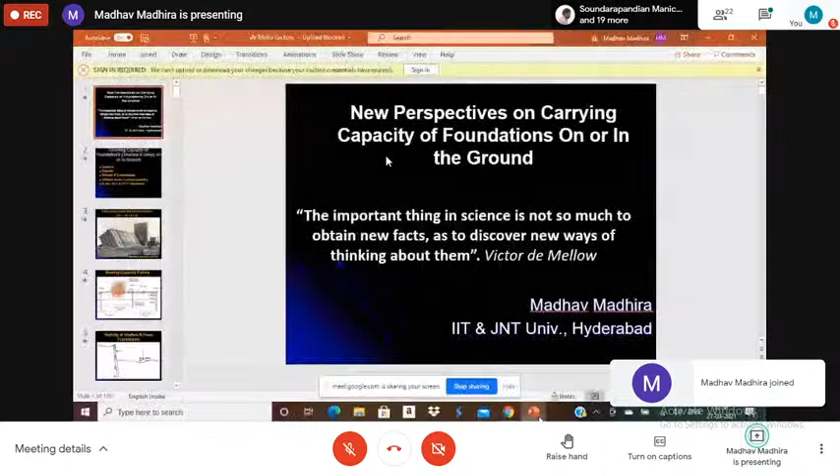Okay. So, let me. Can you see my screen? Visible, sir. Okay. Good. A very nice morning to all the participants, and I would like to compliment you for taking time off on a Sunday and preceding a Holi holiday. Wish you all a happy Holi tomorrow.

Today I'm going to talk about something very different, which will hopefully shake your thinking. I don't know how many of you are aware of the typewriter. My younger lot may not have seen it, but those of us who were born quite some time back lived with a typewriter. The typewriter was developed somewhere in the 1860s, and the keyboard was very different in the beginning. In the English language, the most common letters in any word are predominantly A, E, I. So when the original keyboard was designed, they were in the center where you could have your pointer finger, the second finger, because that is the easiest one to press to get the letter on the paper.

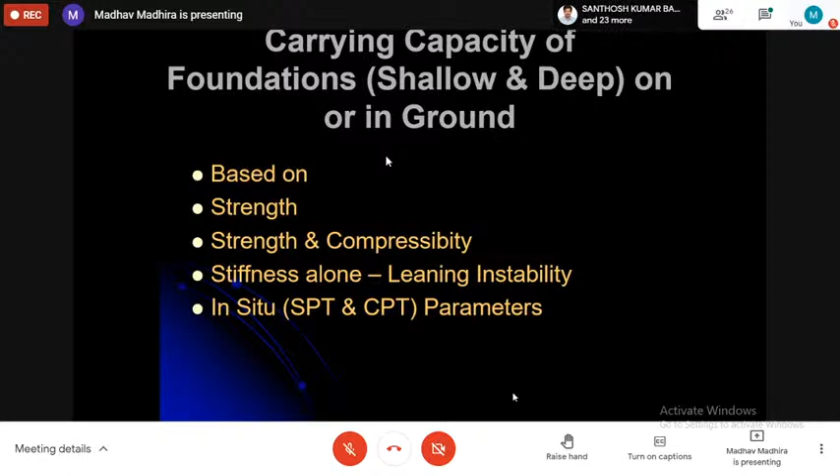But finally, I would like to advise that we reduce emphasis on the strength and depend more on in situ tests like the standard penetration test or cone penetration test, and get the carrying capacity based on serviceability criteria, which means the settlements and deformations with respect to the structure or whatever it is. So this should be the main crux of my presentation, and I would like you to pay attention to why I keep saying that.

Historically, if you look at it, the first grain failure in bearing capacity reported was the Transcona grain elevator in Canada. It's more than about 100 years now. You can see it's a very tall grain silo. Probably the width is about 30, 40 meters, but the height is much more than that. And it was located on soft Canadian clays. When they were filling it up, once the load reached a certain level, it started failing and collapsed.

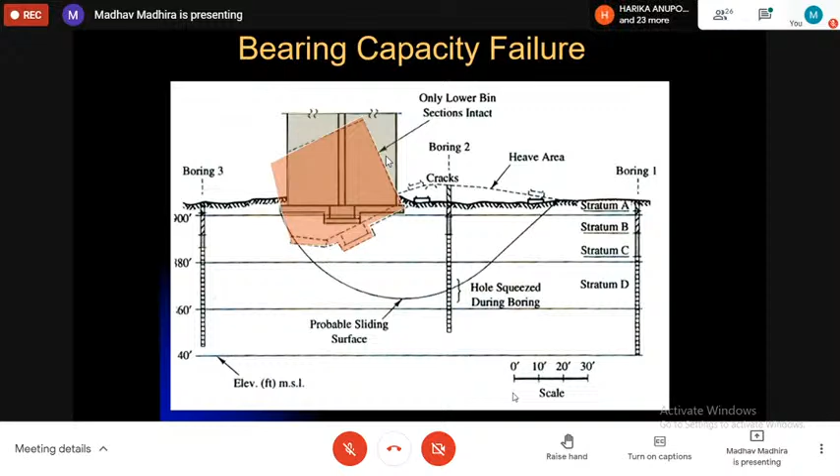Then people postulated the possible sliding surface. As you can see, it starts from one of the ends of the footing, and you can see a kind of circular, semicircular, log spiral kind of failure. And because it has gone so deep into the ground, there's a lot of heave also. The main issue I would like to say is that the soil here is extremely soft and the weight is too high because nobody knew about the bearing capacity theory. They just built it and then loaded it. And that's how the whole thing started. And then they said, okay, we'll try to work out the mechanisms.

So when I look now at the stability of both shallow and deep foundations, as you can see on the right, this is a shallow foundation. We talk of bearing capacity here, whereas in the case of piles, it could be both axial and lateral load. And if it's lateral load, it's a different kind of mechanism, but we are interested in the stability of both shallow and deep foundations.

And our thinking has been frozen from 1943 when Terzaghi came out with his book, Theoretical Soil Mechanics, in which he enunciated that the problems of soil mechanics can be divided into two principal groups. Stability problems, and he called the other elasticity problems, but I call it deformation or serviceability criteria problems. He never realized that these two are related. This is what I want you to start visualizing.

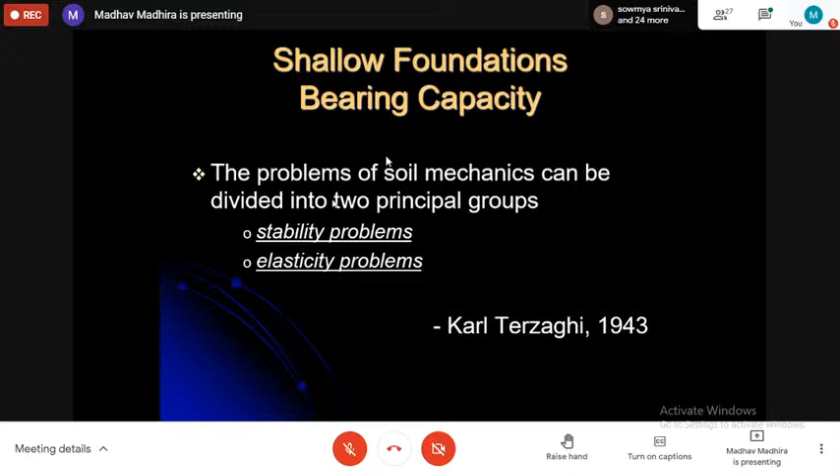He said one set of problems are purely stability problems, where you get bearing capacity. The second set of problems are deformation or elasticity problems, so we calculate settlements, etc. But is that true? I plotted the stress strain curves of all the civil engineering materials.

What are they? We have steel, which is probably the first major manufactured civil engineering material, starting in the late 18th century and 19th century. So we have the standard steel with ultimate strength of 415, so we call it Fe415. Then we have a low yield steel, Fe250. Then we have concrete of various strengths. So if I say M50 or M15, M30, etc., I can plot them.

To make it more visible, I changed it to a log scale for the stress. And you can see the stresses vary from 0.001 megapascal to 0.1, 10, 100, and 1000 megapascals. Because it's log scale, you can see that soft clays have maybe strength of around 10 to 15 kPa. Stiff clays and loose sands probably can have something like 40, 50, 70, etc., whereas dense sands can go up to much more than that. So now you are able to see the strength. But I want you to still realize where is 415 megapascal and where is 10 kilopascal.

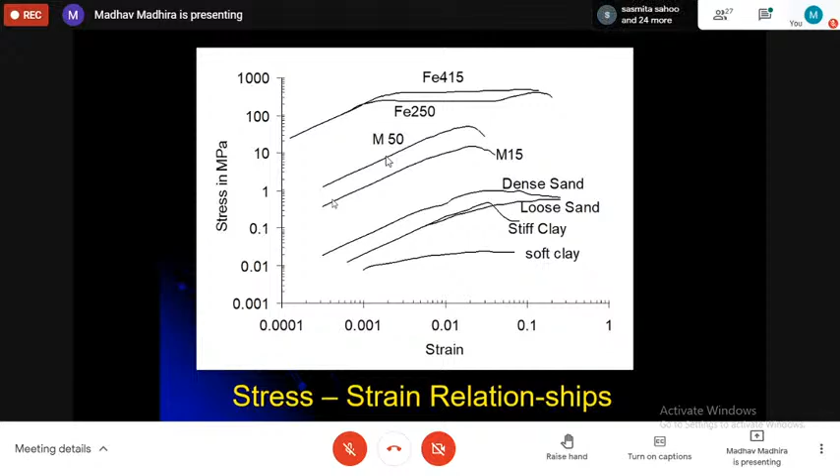So with any stretch of imagination, can I say that the behavior of the soil can be represented by the behavior of steel? Have you ever thought of this? This is the new perspective I want to give you. We have been teaching it and we probably will continue to teach, but I want you to at some stage realize what we are doing is not correct. We need to change. I believe there is a similar exercise in medicine.

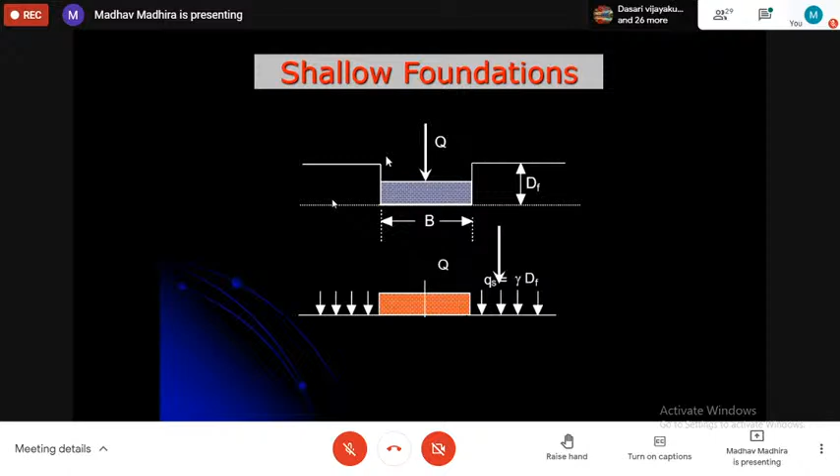And then we follow Prandtl. Here I want to go back to history. Terzaghi was not a civil engineer, he was a mechanical engineer. And mechanical engineers study Prandtl mechanism because Prandtl worked on steel. He was working on how, if I have a steel ingot, do I make it into a steel plate or a channel or a girder? So they heat it, put a high pressure, and it starts yielding and flowing.

So in order to find out what stress he has to put on it to get flow, Prandtl came up with this mechanism. He said, if I put the load or the stress on the steel, please remember, this was for steel. Prandtl never knew anything about soil. Neither did Terzaghi know anything about soil till after he got into geotechnical engineering in the 1920s, 1925, etc. And look at this. This mechanism was given by Prandtl for steel. You recognize the central triangular core, the rigid one, then the radial shear zone, and the passive zones on either side. These angles, alpha, psi, etc., are what we can meddle around with depending on the angle of shearing resistance.

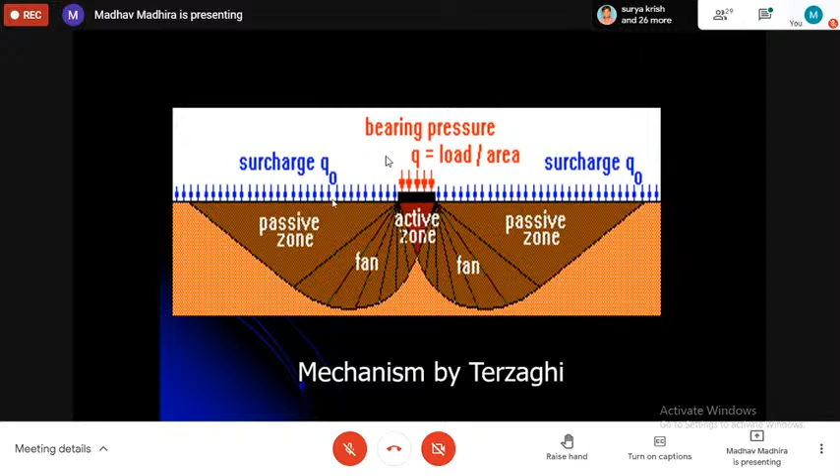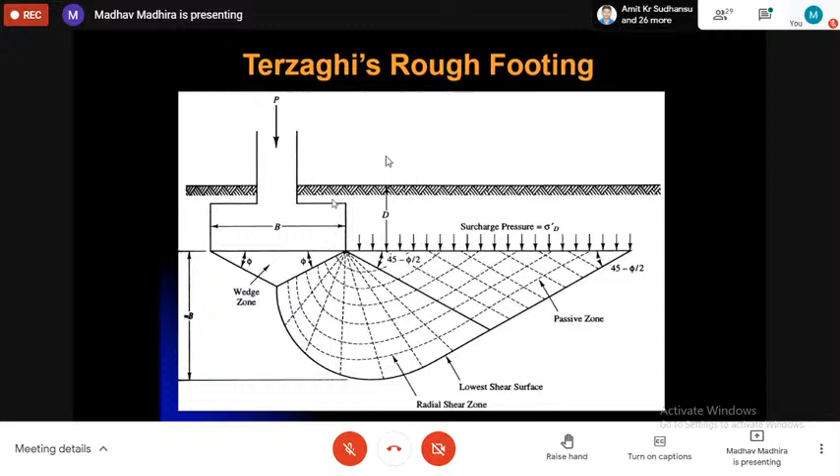So this is how we now convert that into our bearing capacity problem, which is what Terzaghi has done. He said that below the footing we have an active zone defined by 45 plus phi by 2. Then we have a radial shear zone, and then the passive zone on either side of it. Because Terzaghi was aware of the Prandtl mechanism, he said, let me apply it to soil. And of course, then we keep changing. We gave another one for rough footing. He said the active wedge is now defined by the angle phi and not 45 plus phi by 2. We don't use it any further, but we go back to our standard one.

Meyerhof said, no, why are we neglecting the shear strength of the soil above the footing level? He combined it. And I can show at least 100 different papers which extend the same Terzaghi concept, which is borrowed from steel and being applied to soil.

And at this stage, I want you to realize how accurate, how relevant, how rational is it to use a theory developed for steel on a material whose strength and stiffness are 10,000 times less, whereas strain at failure is 10,000 times more. Are we justified in doing this? That is where I would like you to think.

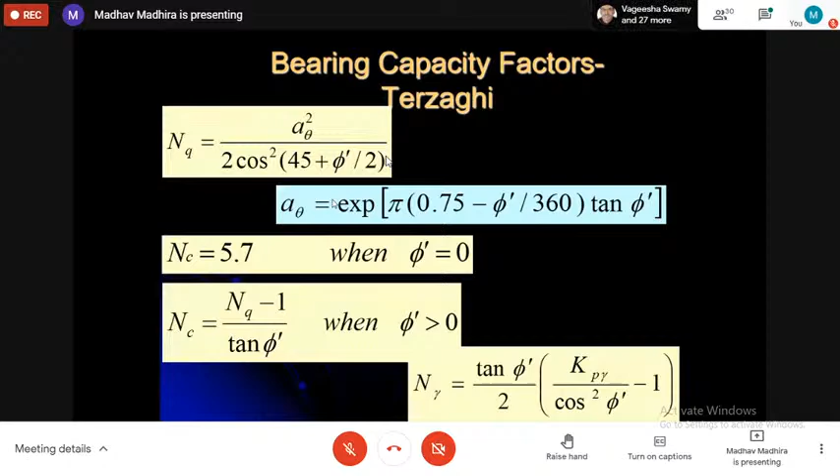And of course, these are all details of how to calculate the bearing capacity factors. And if you look at any of these bearing capacity factors, they depend only on the angle of shear resistance phi, and c and q and gamma. And then in the expression anyway, you have the coefficients too. So nowhere do we have the deformation coming into the picture. That is my point. All our bearing capacity theories seem to depend only on the strength parameters and they don't look at the deformation.

Then Vesic did some very interesting work. He started testing soils at various relative densities and he found a very interesting phenomenon. You have first general shear failure, then what you call local shear failure, where the failure surfaces are not developed fully, only the wedge and the radial shear zones are formed. Then he also tested under very loose condition, in which case there's no radial shear zone, only an active wedge, and as you keep increasing the load, the footing keeps going down and down. So what he said was, there are three possible modes of failure.

General shear failure, as we all know, is where the failure mechanism is clearly developed and there is heaving, as you saw earlier in the Transcona grain elevator. Then we have what's called local shear failure, where the radial zone is not mobilized, so we show it as a dotted one. And then, of course, the punching shear failure, where there is no radial shear zone either.

If I look at the load displacement relations, you can see that the maximum, or peak stress or bearing capacity, is clearly shown, and a sort of collapse is indicated, because if you try to load further, the structure will fail. In case of local shear failure, the failure starts and then you end up getting a kind of asymptotic value. Whereas in the case of punching shear failure, there is no clear ultimate load. As you keep on adding load, there will be more settlement and more deformation.

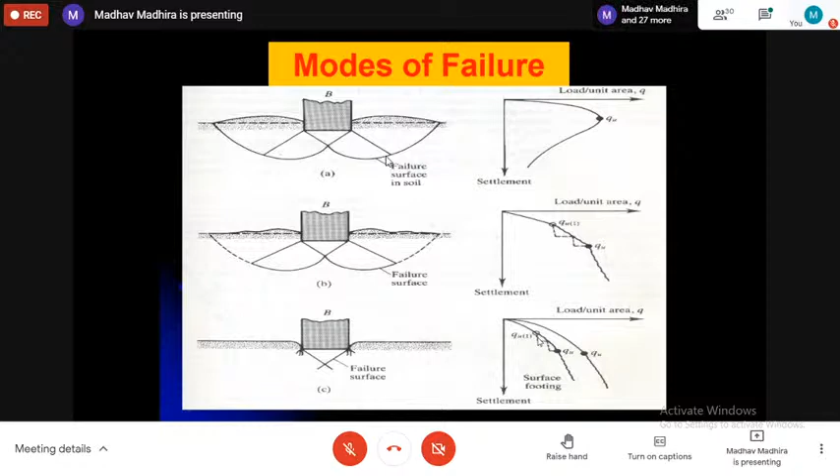So based on this, the following design chart is given, which is not exactly a very analytical one, but a general guideline. If you have very dense soils or very stiff soils and very shallow foundations, where D by B is less than 2 or 2.5, you expect general shear failure. You need to have very strong, stiff material to get general shear failure. For medium dense sand and medium depth foundation, you can expect local shear failure. For loose sands and deep foundations, it is punching. This is a general guideline. Nobody knows how to get them exactly, but these seem to be working fairly well. But at least we recognize three different varieties.

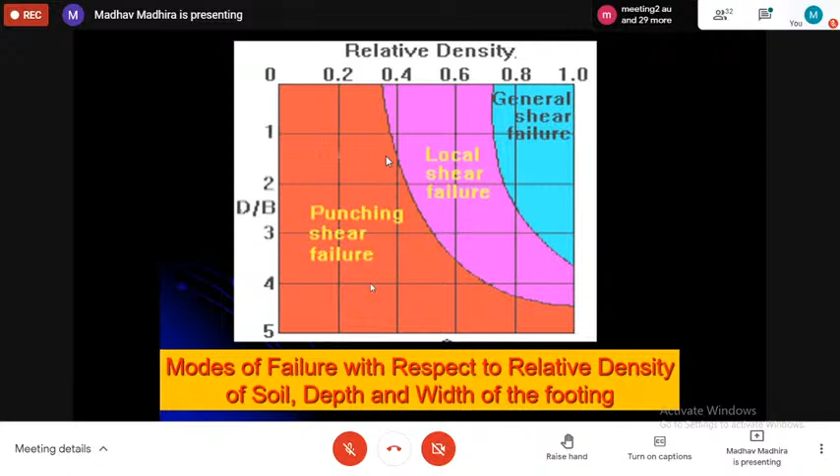So for general shear failure, even less than 10% is very large, 5 to 10% of deformation. I mean, if I have a footing of, let's say, 2 meters, 10% of that is 20 centimeters, whereas we don't allow even 20 centimeter settlement. So we never get that. Whereas if I have local shear failure, the strains can be anywhere from 12 to 15. And in case of punching, it could be 15 to 22, 25%. This kind of thing doesn't hold good. Now think how relevant the general bearing capacity formula is.

It depends on several factors. If I'm plotting normalized settlement, settlement divided by width of the footing, against the mobilized bearing capacity factor, you can see it depends on smooth and rough footing. It also depends on the dilation. Most granular materials dilate, and it depends on the surcharge too. If I have q equal to 10, I get this value. This is all through the finite element method used by Professor Potts at Imperial College. You can see both load displacement curves are very different, and they are functions of the dilation angle, how much volume change you expect. If nu is equal to 0, then there is no dilation. But if nu is equal to 25, there is a large dilation. And you get this factor as a function of even surcharge stress. Have you ever realized that Nq depends on surcharge?

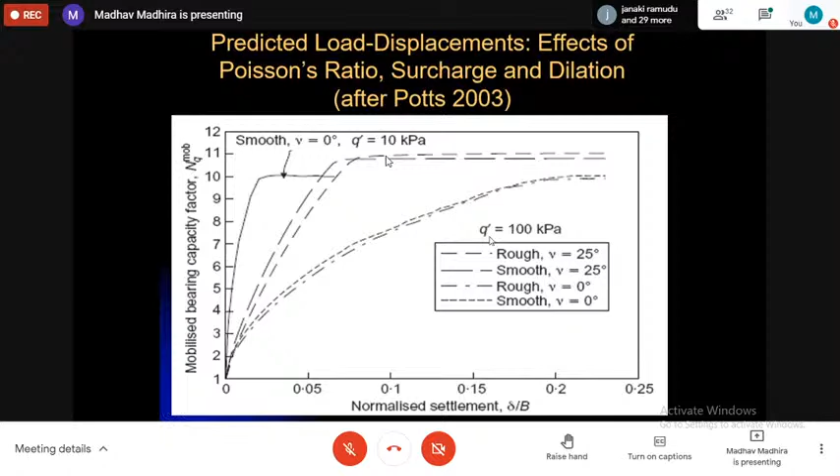This is another set of data you can see for smooth and rough footing, again from Potts. So apart from all those c and phi, you have dilation coming into the picture and the surcharge effect, and the smoothness of the footing also.

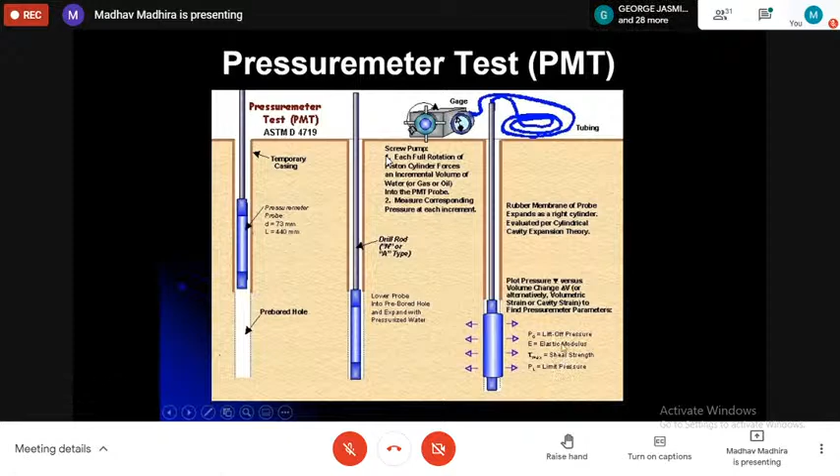Now I want you to switch your thinking from simple bearing capacity to a new kind of test which was developed way back in 1960 by Menard. What he did was make a hole, put a cylindrical probe inside, and start inflating the cylindrical probe, which pushes the soil radially outward. This is called the pressure meter test. As you can see here, in the pre-bored hole, I installed the pressure meter. I increase the pressure, and from there I can measure the amount of liquid you are pumping inside, and you will get what is called the limit pressure, PL, from the liftoff, just when it is touching. You can get both the ultimate shear strength of the soil as well as the deformation modulus from this test. If I put the schematic, this is how it is.

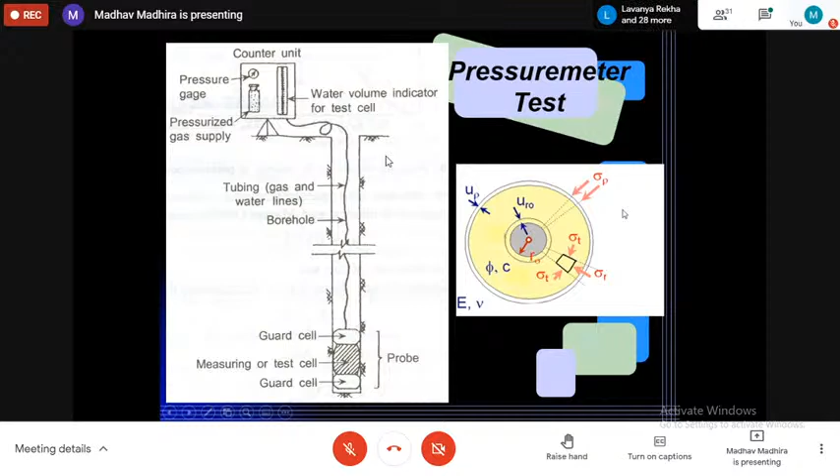We normally provide a guard cell on the top and bottom because the central portion is going to be one that will expand radially. And how does it do? You can see here, this is the probe. Initially, you will have a plastic zone, then you will have the deformation elastic zone. You can develop enough theory, which is what was done by Gibson and Anderson way back in 1961.

The limit pressure PL is equal to Cu into Nc star plus sigma h. Can you identify that this is nothing but, in case of clays, Q is equal to Cu Nc plus Q naught. That's how we calculate ultimate bearing capacity of foundations on soft clays. This is very similar to the ultimate bearing capacity of soils, except in the limit pressure, we have Nc star, which is equal to 1 plus natural log of G by Cu.

Do you realize one of the most significant improvements? Now the bearing capacity factor Nc is a function of the ratio of shear stiffness to undrained strength. Would you now say the bearing capacity factors are not functions of phi alone, but they should be functions of stiffness and strength parameters? Why do I say that? Steel is a rigid plastic material. There is very little strain before the material reaches failure. Soils are deformable materials, which means in order to reach failure, they have to undergo large deformations. And how do you define large deformations?

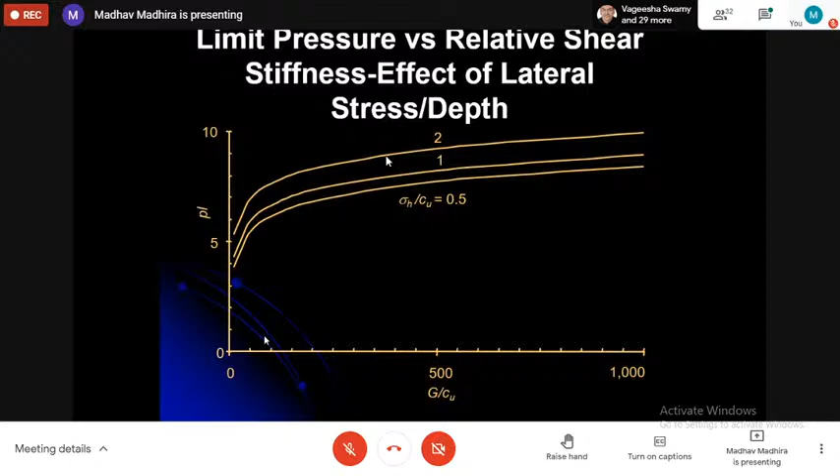So one of our colleagues here, Professor Padmavati, has done a very simple analysis. Look at the G by Cu, that is shear stiffness divided by undrained strength. As you increase it, the limit pressure increases for different values of confining stress or depth of the footing. So sigma h by Cu, if it is very close to the ground level, is 0.5. If I go deeper, I get 1 or 2. Can you see basically the limit pressure is a function of relative stiffness G by Cu, and it's not constant. So can I say that for the first time we have a new way of looking at and estimating limit pressure, which you can convert into bearing capacity.

Anyway, what we tried to do was normalize it, and we also did this for granular materials. So here we looked at G normalized with gamma into D, and fortunately the variation does not depend on the friction angle that much. We have tested for angle of shear resistance 20 to 45. All the curves seem to be very close to each other. But the fact I want you to look at is, if G by gamma D is very small, say 1 or 2, the limit pressure reduces to something like 55% of the rigid plastic one. So when I have very stiff material, I get 100%. Very loose material, it can be half of it.

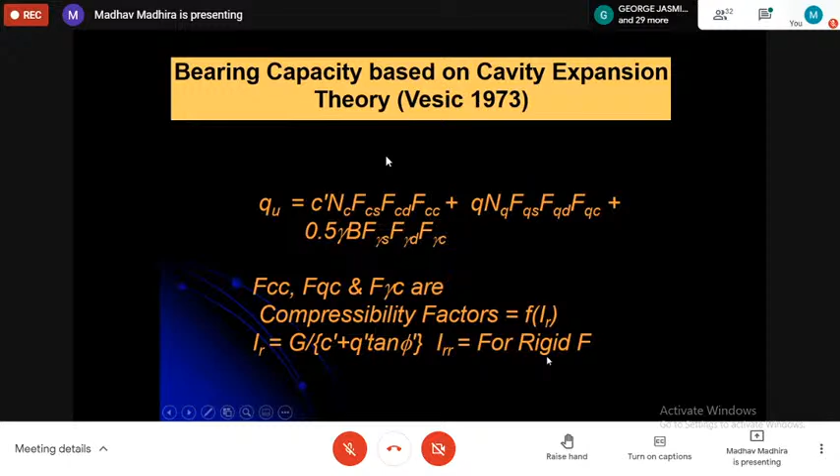So basing on that, we again try to calculate the latest bearing capacity expression. You can see Cu and C, shape factor, depth factor, and we have FCC, which is your compressibility factor, FCC, FQC, F gamma C. And all of them depend on this rigidity factor, which is given by G by C plus Q tan phi. And of course, for very rigid, no dilation, we have rigid foundation too. And we try to calculate all of them, and you can see these factors are given by basic FC, FQ, and from there you can get F gamma anyway.

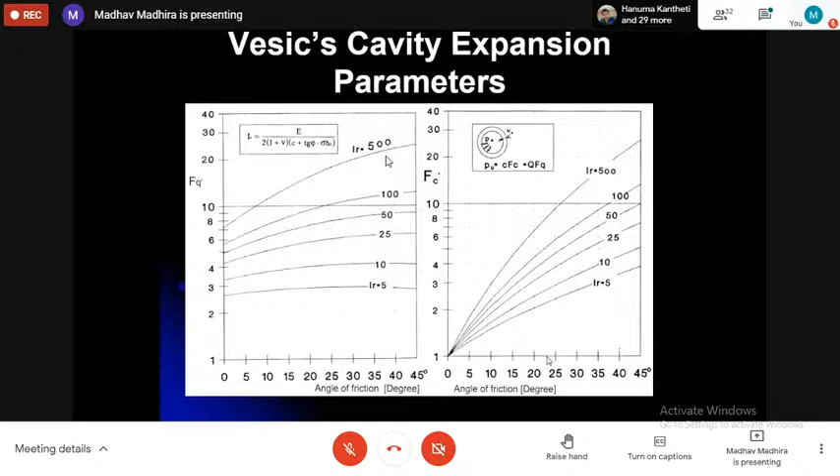Using that, we try to calculate how much the bearing capacity is affected. You can see that if I have a rigid material like what Terzaghi has given, I get 100% of what he predicted. But in reality, when G by gamma D is less than, say, 1, 2, 5, or 10, the bearing capacity reduces to less than 50%, maybe 20 to 30%.

I want to look at this range, depending on the C by gamma D. So what is the value? And this, of course, is the volume change that you expect due to dilation. Now, I want you to realize that bearing capacity is a function of the strength and stiffness, because everything depends on this parameter, G by gamma D, and of course, the relative rigidity factor, which is nothing but volume change.

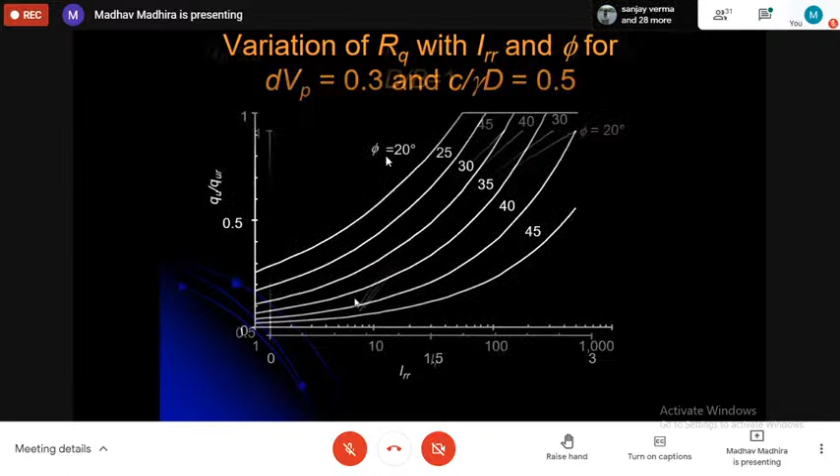And here are the different values for the friction angle, 20, 30, 40, 45. So the strength can reduce depending on the relative rigidity, even without all those gamma values, from 1 to as low as 55%, as I mentioned earlier. So when I'm looking at the ultimate strength, Qu, for a deformable solid with respect to what Terzaghi has given, that is 1. I normalize with Qur, which is the rigid plastic material. And look at phi equal to 20, 25, 30, etc.

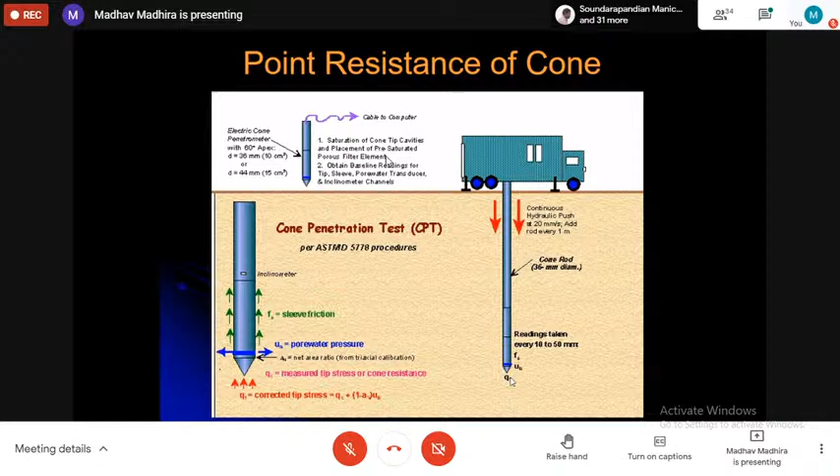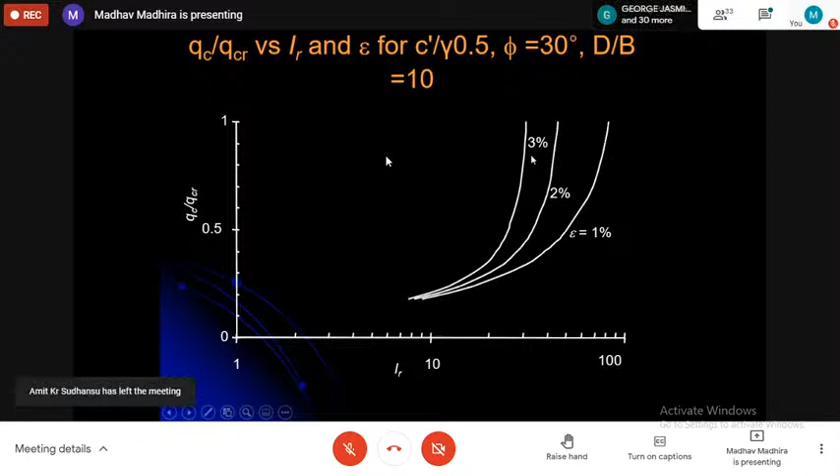So when I'm designing axial loaded piles based on tip resistance, because this is how we do the calculation, please remember the tip resistance is a function of G by Cu, and you have to calculate based on that. This is how we calculate Q, base resistance, and the shaft resistance. Shaft resistance is integrated, and here I would like to say ultimate resistance, if you calculate based on N value, is fine. We take it as 40 times that with the L by D and we put a maximum value. And we are not depending anymore on C and phi. We are only based on either N value or tip resistance.

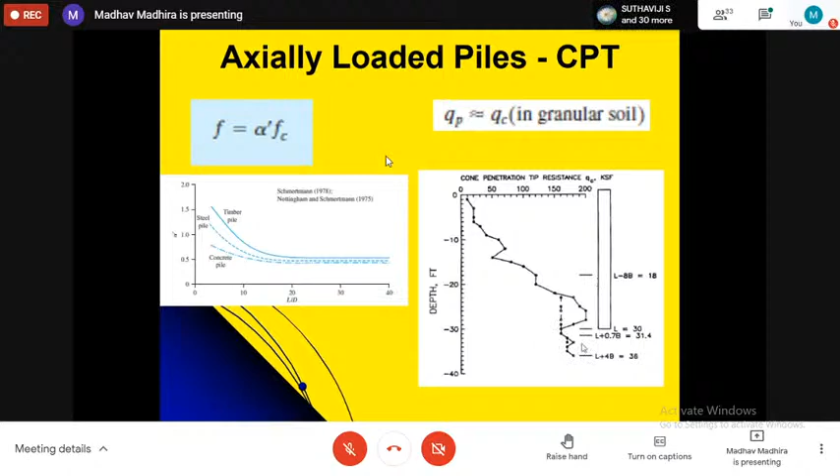Even that, we should not depend on a single value. If this is the depth, we go at least 3 to 4 diameters above and 4 diameters below. We try to average out the N value or the tip resistance and get the value for calculation. No more gamma B, etc.

So here, if you want to do that, you still have to go for the Rigidity Index factor, which is how we calculate it. E by 2 into (1 plus nu) is nothing but the shear stiffness. So please remember, if you want to calculate based on strength parameters, you have to correct for the deformations as well. This is Nq, where N sigma is a function of this expression, and IR has a very significant contribution to this. And IR, as I told you, is a function of shear stiffness by the stress into tan phi. So that again is how I would like to modify the whole bearing capacity for axial and bearing.

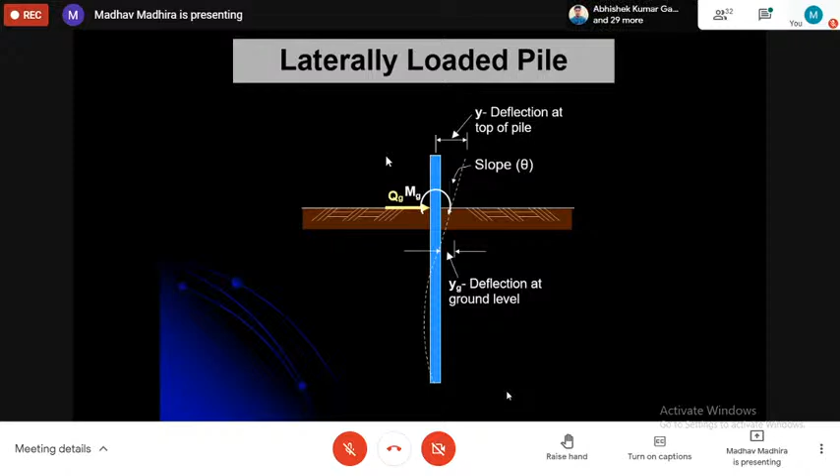Then when you come to the laterally loaded pile, it's a little more complicated, because with laterally loaded piles you end up getting large deflections, and then we may have to have the complete load displacement response. So we did some work on this, and we look at different kinds of pile lengths, fixity, etc. A laterally loaded pile acts as a beam and not as a column. And the beam can be a short one or a long one. The end conditions could be free or fixed.

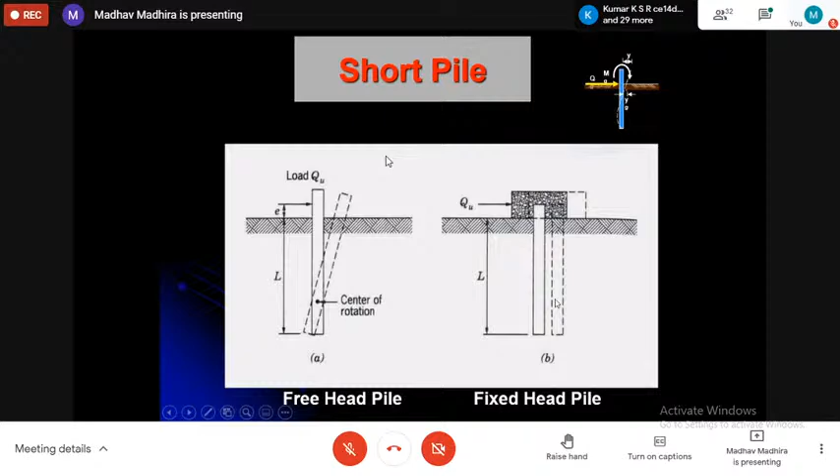So depending on how you look at it, for example, if I have a free head pile and I apply a lateral force at a certain eccentricity E, I assume it rotates about some point. So the pile will rotate to the right above the point of rotation and will move to the left below that. Whereas in the case of a fixed head pile, the whole mechanism is very different. The whole pile will shift because it's a short rigid one. It purely translates. And if I now try to measure these things, we have some standard solutions given by Brinch Hansen from Denmark and Broms from Sweden, which unfortunately are very outdated, in the sense they were given in the 1960s, when our concepts of soil mechanics were very limited. And they say, okay, we'll take the pressure linearly increasing for the soil pressure and calculate.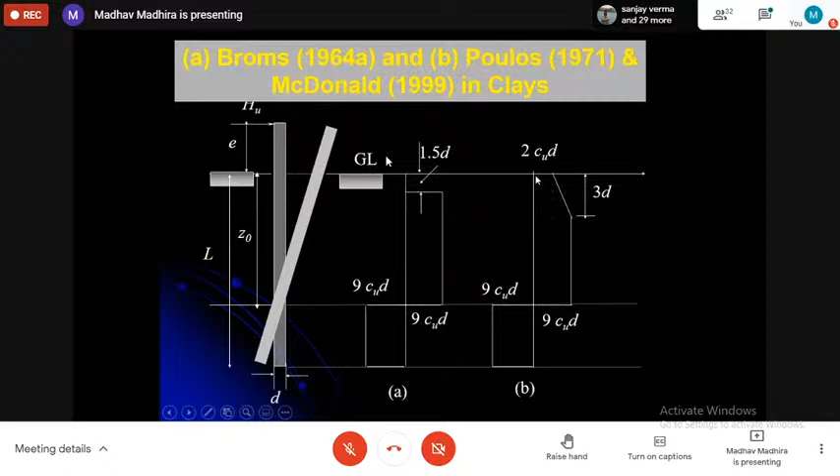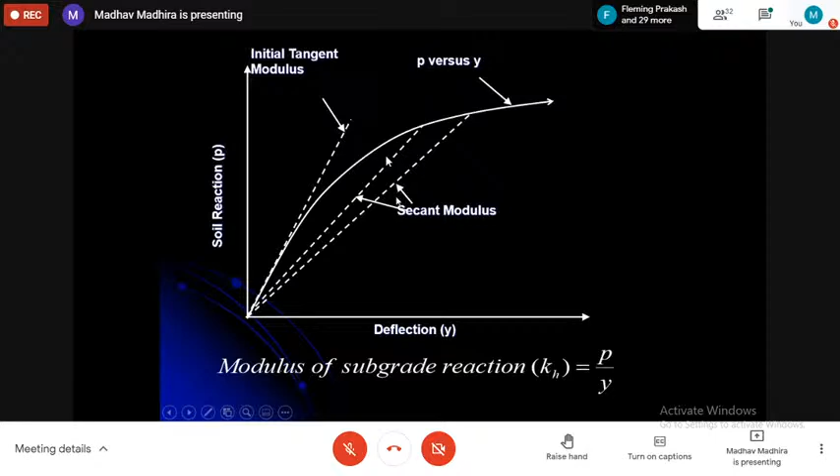We put in now Ks, which is the stiffness of the soil-pile interaction. We are treating the whole thing as a Winkler spring, and we have a load deflection behavior. We have deflection here versus soil resistance, and we know that it's more like what they call a PY curve. If I look at very small displacements or deflection, I get the initial tangent modulus. But as we increase the load or the stress, the curve becomes flatter. Then you have to take a secant modulus. Another form would be to treat it as a hyperbola. This is what we have done.

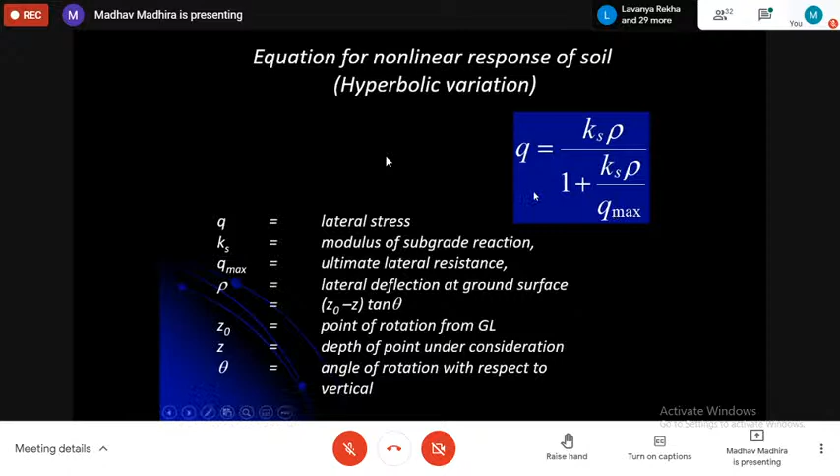We say that Q varies like a hyperbola. The expression is simply Ks into lateral displacement by 1 plus Ks into rho by Q max. This is your ultimate lateral resistance, which is 9 Cu or whatever you have there, whereas it's a function of both stiffness and the ultimate resistance. So once we define the response Q as a function of these, we can calculate.

In case of sand, we found another very interesting thing. The stiffness Ks increases with depth. Actual variation could be anything, but we make it simple in terms of a linear variation, so that I can say Ks increases linearly with depth, and the constant parameter is called NH. So we define two parameters, the stiffness into length by Q max, and then in case of sands, we also have NH, which is the rate of increase of Ks with depth. So in case of clays, we assume Ks is constant. In case of sands, maybe we'll have to consider linear too.

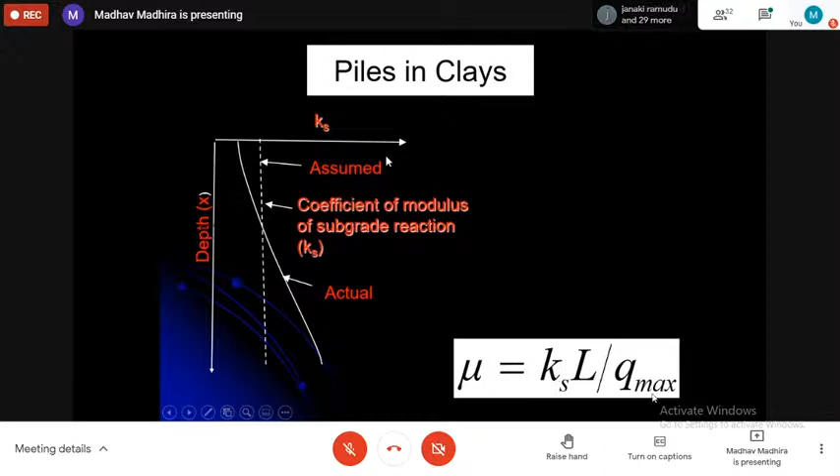But I want you to look at this parameter mu, which is Ks, the coefficient of subgrade reaction, into the length of the pile by maximum Q, which is 9 Cu if you want to consider, or 3 gamma prime. And here we found out how the load varies with respect to displacement as a function of mu. If you remember, mu is Ks into L by Q max. If I have an infinitely strong material, mu is 0, I get a linear variation. Otherwise, I find that the load increases with displacement, and in some cases, it may not even reach the ultimate value, except in case of very weak materials where the ratio mu is maybe 100, 200, etc.

Now, this tells you again that for lateral capacity, there's nothing like an ultimate value. It's a function of your displacement. How much displacement are you going to tolerate? And that depends on the Ks value and, of course, Qu, which is your 9 Cu. So apart from strength, the stiffness matters too. This is for eccentricity e0, that means the load is applied at ground level.

Then we were trying to compare what Broms is doing and what we do. In the sense, Broms has taken, in case of sand, 3 times the passive coefficient Kp. Why? Because the passive coefficient is for a wall, which is a plane strain problem. A pile is a cylinder or a square, so the failure can go around the pile. So he said, let me take 3 Kp as the maximum resistance.

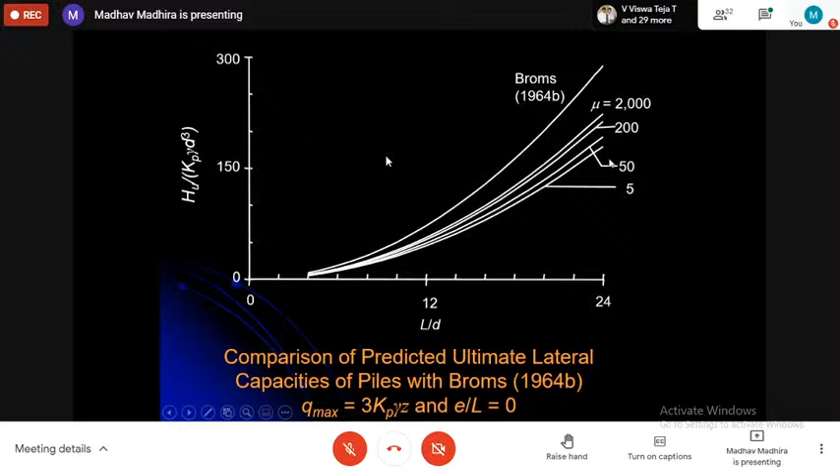So we did similar charts, and we were trying to figure out where Broms comes in. It turns out that if I take 3 times Kp, 4, 5 Kp, etc., roughly Broms matches with somewhere around 3 Kp, while ours looks like 4 Kp, etc., which means Broms' is again a very arbitrary value of 3 Kp.

I don't know how we ended up, but some postulation he made, which we shouldn't actually buy all the time. So we then said, we have predicted the ultimate load. Let us also try to see how the deformations look like. So we were comparing measured data with our theory.

And you can see here the measured points don't fall anywhere near Broms or any of the other ones. What we have found out is very close to that, both 5 and 6, the match here. Whereas if you look at Prasad and Chari, Zhang, etc., they don't fit anywhere. These are all experiments done by Adams and Radhakrishna way back in 73.

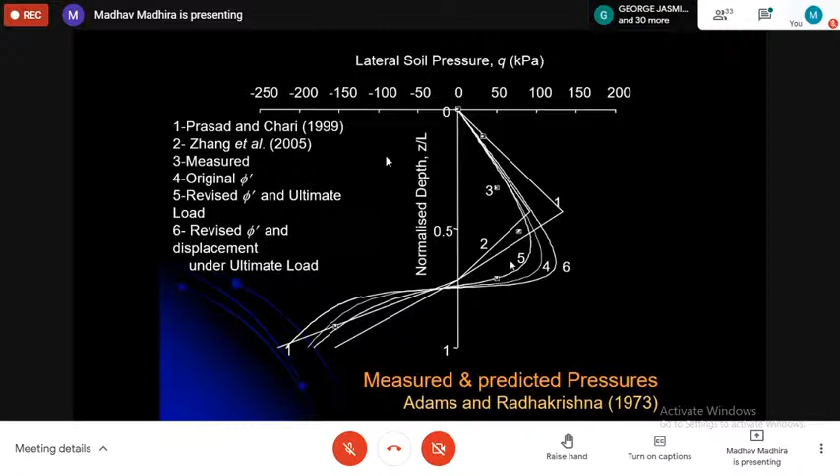And here again, I want you to see the measured is 3, these points, and you can see our 5, which is very close to whatever is measured. So this is what I would like you to look into as a possible result. Then we also had a few other theories like McDonald, and we also find that while they fall in this range, both Broms and McDonald do not look at the deformation characteristics.

So we have a whole range of design charts where H by CuD square, the ultimate lateral capacity, for different lengths I can estimate based on this parameter mu, which is nothing but Ks into L by Cu. And it's a variable. The ultimate capacity is a function of relative stiffness.

I have another set of data which we found out, where at failure, what is the variation? And as I said, Broms neglected the strength here. So his strength varies from 9 Cu here to the right, above the point of rotation, 9 Cu below that. McDonald just modified, instead of neglecting, he took a linear variation from here to here. Rest of it is very similar to Broms.

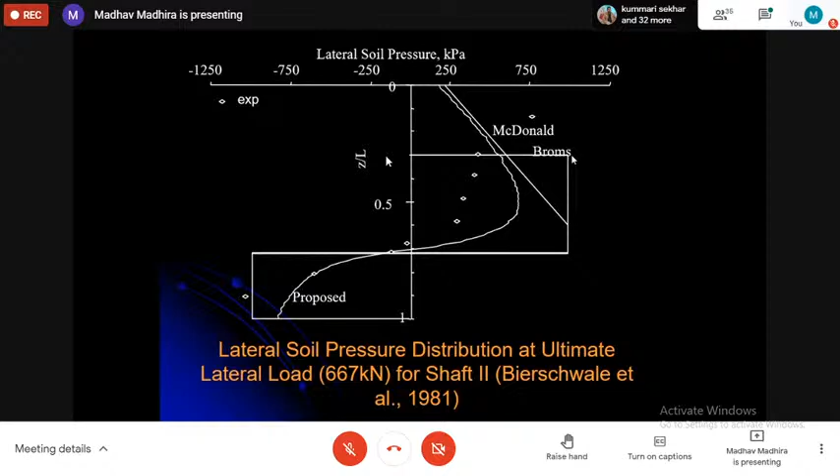Whereas these are the measured values which were measured along the pile at failure, and we found out that our prediction is not too bad, except here there is much less compared to what we did. But you can see our predictions are much closer to both Broms and McDonald. So we can see that deformation is a very important thing.

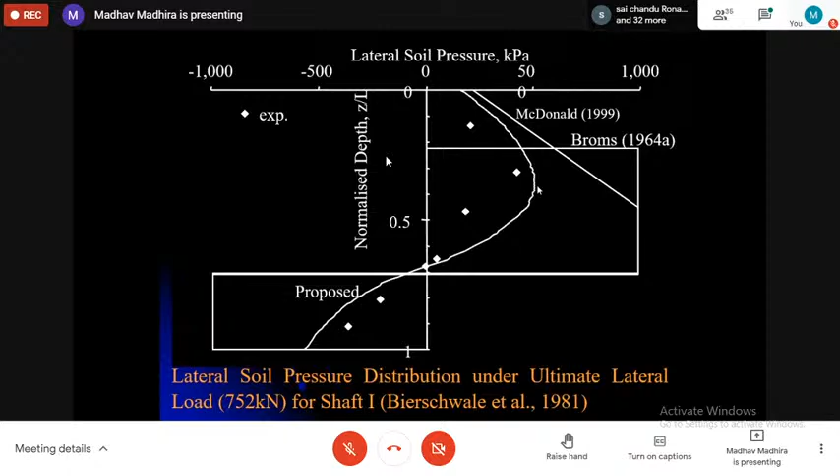Another experiment we have for shaft 1, and you can see the fit is even much better here now. Right? You can say that you cannot neglect the relative stiffness. You have to consider that, and you can predict it.

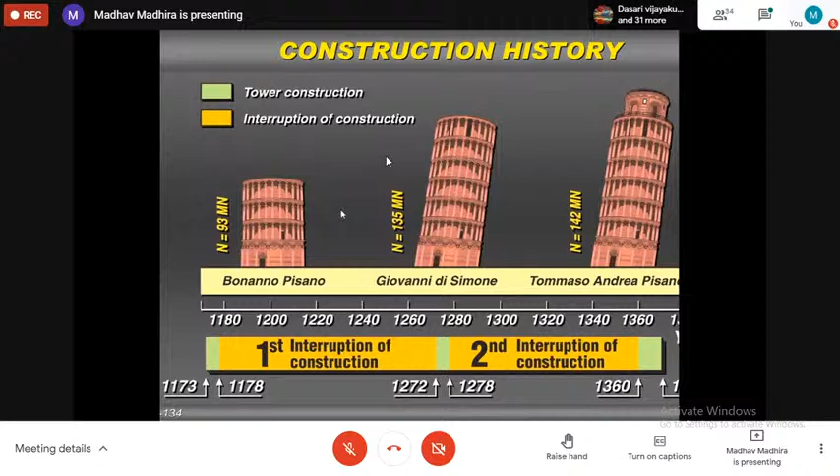I think most of you know the history of it. It was started in probably the late 12th century, went on for construction for about 200 years, and it was tilting right from that time, but they went on constructing in spite of it. And so you end up getting this final position, which was reached somewhere in 1990-91. The maximum tilt was around 5.5 degrees, and out of plumb deflection or movement is around 4.3.

I think you know that at this stage, they froze the tourists reaching that place because they were afraid of the Tower of Pisa falling. They invited 3 famous geotechnical engineers, Carlo Viggiani, Michele Jamiolkowski, and John Burland from England. They said, what can we do about it? They came up with what you call controlled extraction to correct it by something like only half a degree, and then it made it safe for the next 50, 100 years.

This is how it keeps changing. This is where we had the data from the 20th century. They've been able to measure the tilt. And finally, as I said, it's around 5.5 degrees.

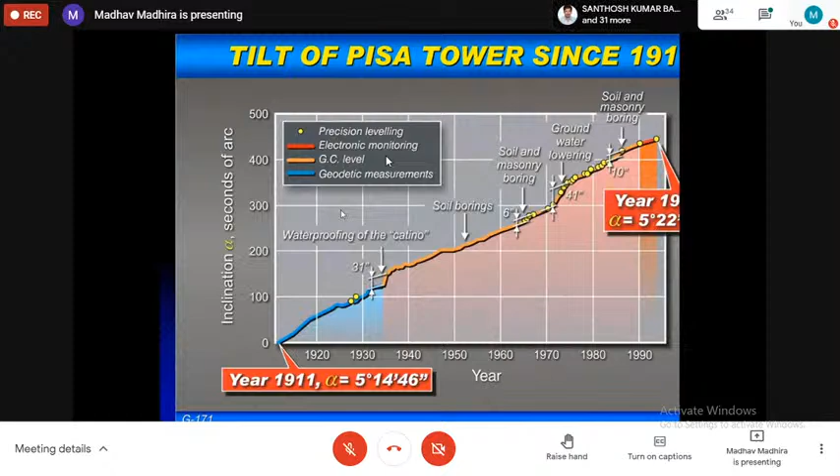We have not only Tower of Pisa, we have a lot of tall structures, of which Dubai's is now 827 meters high. We have Petronas Tower, Taipei Tower. All of them come in the last maybe 100 years. We have very tall structures. I want you to see the whole skyline is changing everywhere in the world.

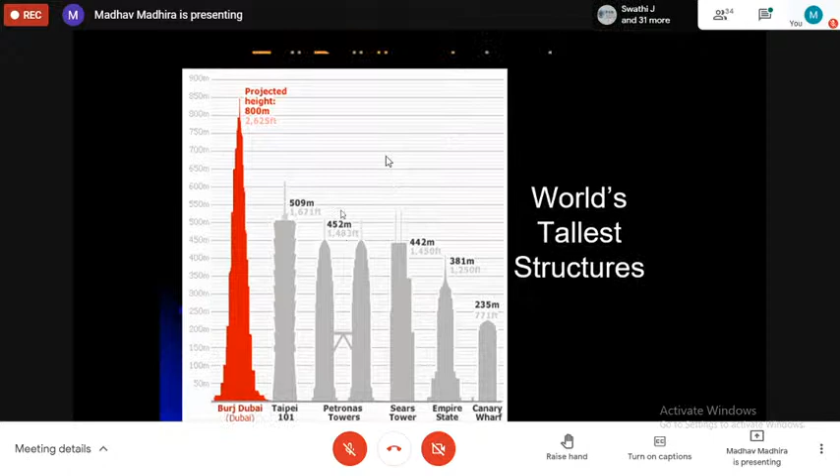I want you to look at the second aspect which I wanted you to consider. Terzaghi never looked at the structure. He only said foundation and the soil. What about the structure? I have a tall structure and I have a deformable solid here, which I show by simple springs. So if I increase the height of the structure, what will happen?

I want you to do a simple test, which I do in the class. I take 2 chalk pieces and press it, or you take the ballpoint refill inside, press it. If you do that, it will buckle, like what you see on this side. And this we call a leaning instability. So what could happen is I have a tall structure, and I have the foundation I show by again springs and with a little dashpot to show creep, etc., how the settlements can increase with time.

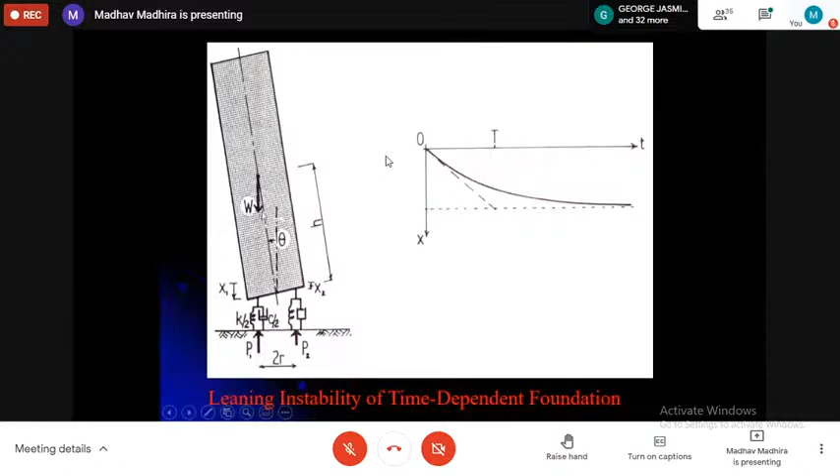For Tower of Pisa, started in 12th century, completed here, height is about 18 meters, center of gravity settlement is around 1.3, radius of foundation is 10, radius of gyration is 5. If you put it, it comes to 0.96, which is very close, and that's why it's likely to fail.

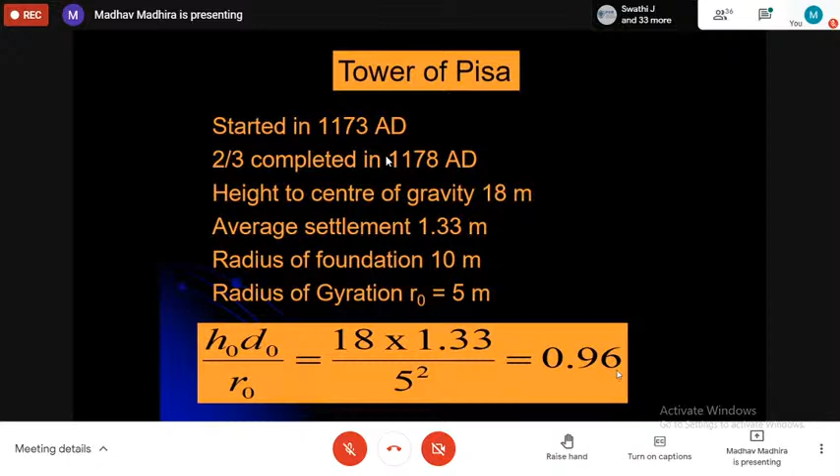Okay, so in order to illustrate the importance of structures, I asked one of our students to do some tests in the laboratory. He tested a footing and he put the load. There's no structure. So we put a very thin disc and we did the load, plate load test kind of a thing. Then we put a structure whose height is less than the width of the footing. And then we put a structure which is higher than that, H is greater than B, and we load tested all three. We have H is equal to 0, no structure, structure of intermediate height, structure of much larger height. The ultimate loads PU1 for no structure is higher than PU2, low structure, which is greater than high structure. How does it happen?

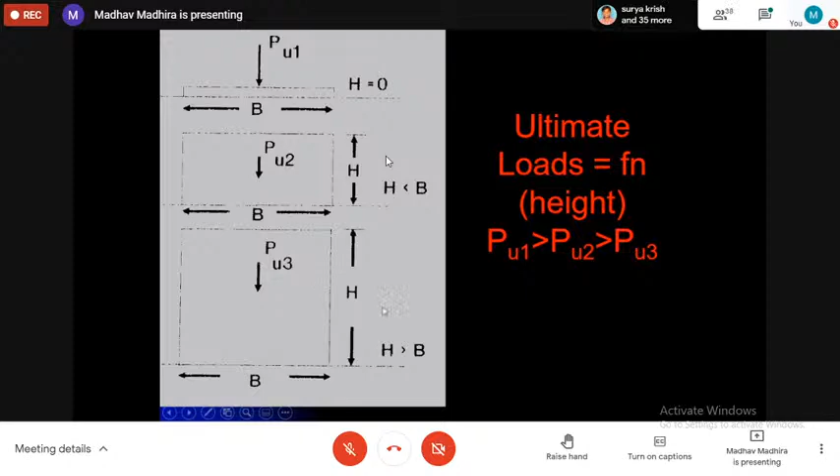I do a simple experiment in the lab in the house. You can do that too. I have stacked these books on my table, a hard surface, and I can do that without it falling. Then I put a small cushion, which is representing soft clay, and I stack the same books as you can see. As I increase the height, can you see the tilt that's happening? And by the time I try to put all of them together, it's about to fail. This is what is happening. This is soft foundation represented by a cushion, whereas if you put it on a hard table, nothing will happen.

For all my young friends, please repeat this experiment in the room. You try to put on a table any number of books if you have, because nowadays I find most students don't have any books. Everything is on the computer. But if you can catch hold of some weights, put them on the table, stack them high, and make sure the height is more than 2 times the width of the foundation or bottom. And as you can see, as you go higher up, the loads on a hard foundation will be stable. But if you put on a soft foundation, they'll tilt.

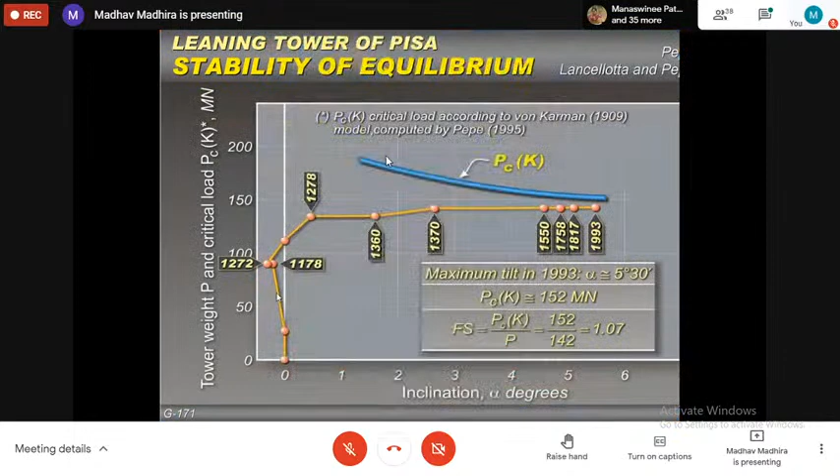So this is what happens in terms of tall structures. And if you can provide creep, it makes it even worse. With time, the inclination increases, it may collapse too. That's what was happening to Tower of Pisa.

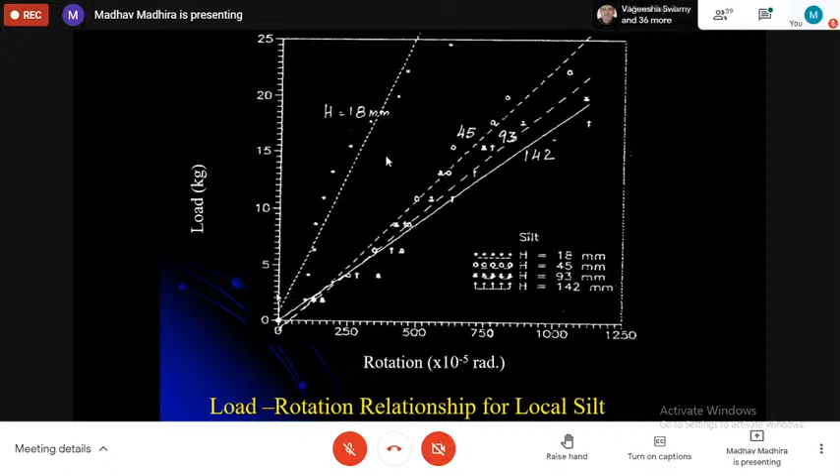Rotation is also very important. We not only have displacement, but you also have rotation. Can you see with the load-rotation graph, when H is small, it doesn't rotate, but at H 142, it rotates. So as the height of the model increases, the ultimate load is decreasing by as much as 10 to 20% or even more. Similarly, what was done for local silt, we repeated with local sand, and it turns out very similar.

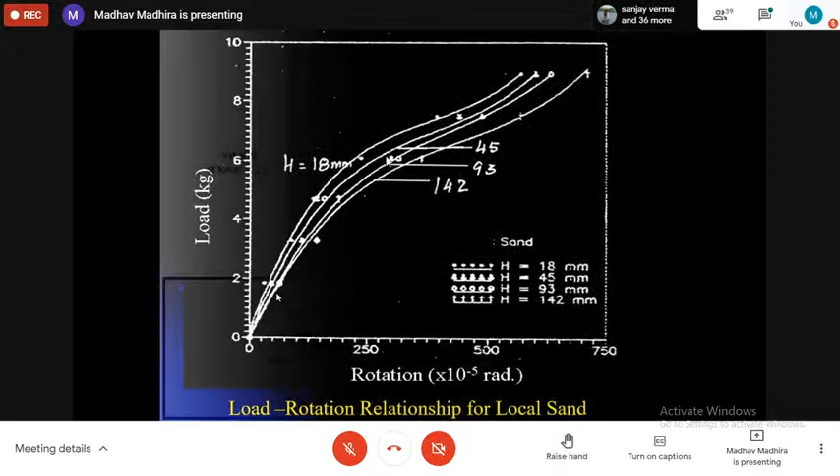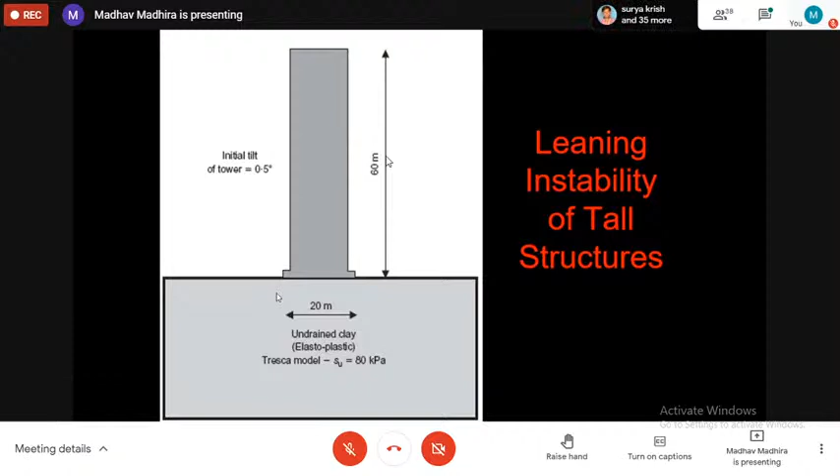Both load and rotation curve, you can see the taller the structure, it rotates more. This could be proved very easily by, again, going back to Professor Potts. What he did, some numerical analysis, he took a tower 60 meters tall on a 20-meter diameter footing and tested under different soil conditions. Look at G by SU. If G by SU is 1000, which means a very stiff soil, you have very high load the tower can take and the rotations are very small.

When G by SU is 100, the maximum load that you can put for the tower decreases from 130 meganewtons to maybe 110, but the rotations increase significantly. If I have G by SU 10, the ultimate load the tower can take reduces to 60, but the deformations become very large, and for all you know, it will fail, which means you have to make sure the stiffness of the ground is very high. You cannot afford to have G by SU less than 100. That's why in the case of Burj Dubai, they strengthened the foundation significantly, even though it was a good sandstone. They had something like 60, 70-meter long piles driven into it, so that the final settlements were less than 75

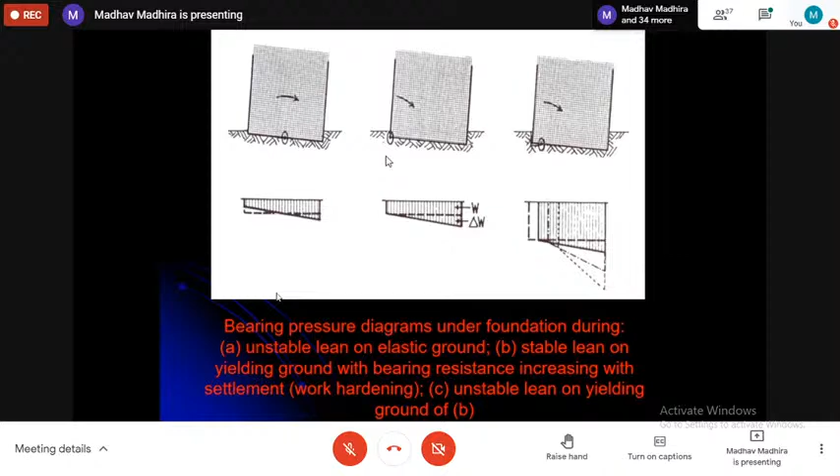millimeters. Then we are also trying to look at the inelasticity, where we say when you load it with a moment, one side gets compressed, the other side gets unloaded. Now, this is another aspect nobody looked into. We said, okay, we'll try to study moment-rotation relationship for inelastic ground. What does inelastic mean? Elastic means when I load, I get a deformation, remove the load, I get it back. In case of soil, the rebound is very small.

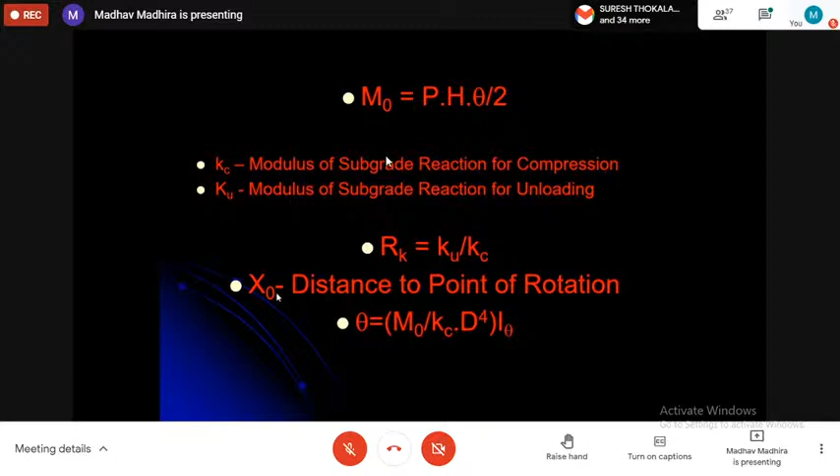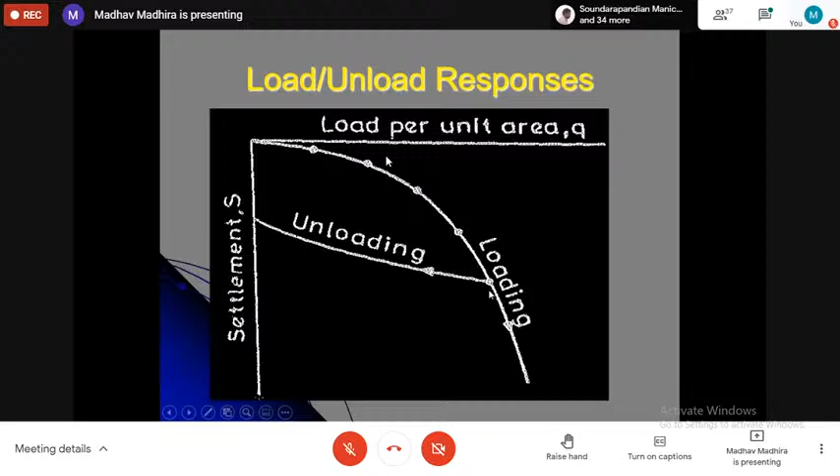So I tried to find out the ratio K unloading, that is the stiffness on unloading, divided by K compression. You can see the stiffness here is K compression, unloading here, by the time you come here, it's a very flat curve. So Kc is small, unloading you get a much higher value. So this ratio could be very large. I'm looking at deformation here, close to failure, and you can see here unloading. And we were trying to analyze in this case what happens for the foundation.

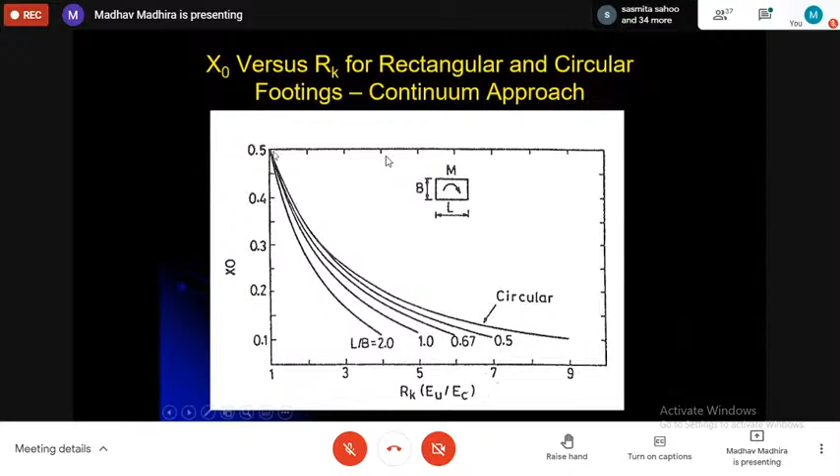And we find that if I look at the inelasticity, at different values, if it is elastic, this ratio is 1, which means the point of rotation is at the center. But the moment K unloading is more than K compression, the point of rotation moves away from the center very much. And then I could find out this is the value of X0 as a function of E unloading by E compression. And you see it's no more right at the center. And the rotation coefficient changed significantly. What you have predicted for elastic material is not valid for inelastic material like soils. So this is another aspect I want you to think about, that when you have inelasticity, everything changes.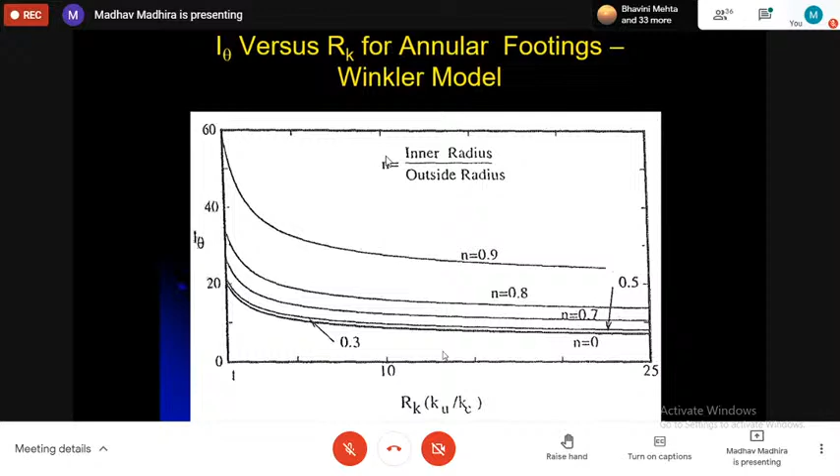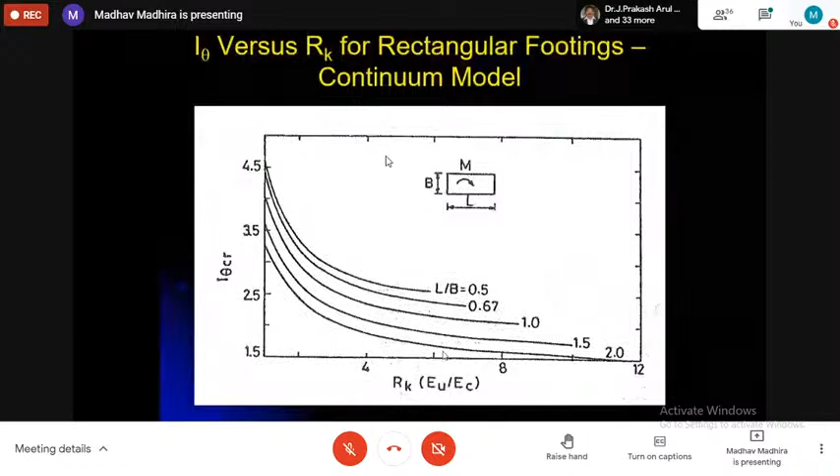We applied this to ring foundations because we found that we were designing a lot of overhead water tanks and the foundations for rings. And what happens in that case, if I have a tall structure, overhead water tanks are top heavy. And so any load moment that you get there will be very significant. So we try to do the analysis for all the cases. And in all the cases, you find the rotation is a function of E unloading to E compression, which means inelasticity has a major contribution here. So this is the effect of depth of embedment. As you go deeper, probably it's less, but as you go to a shallower foundation, inelasticity has much larger value.

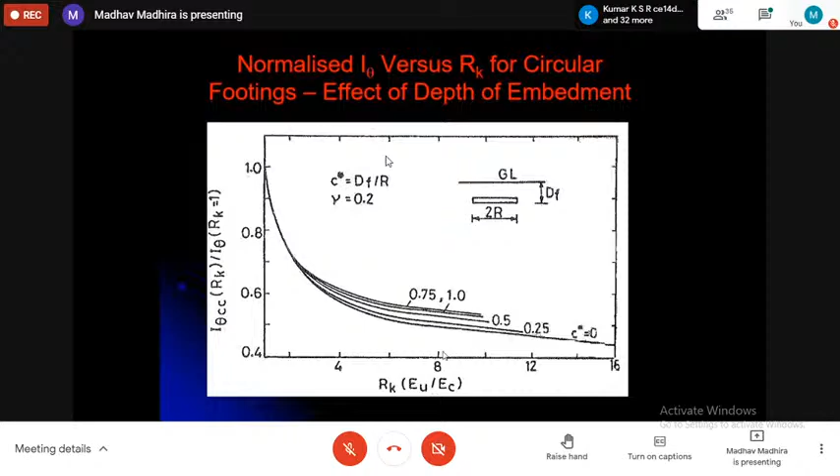That is for earlier, right? This is for circular foundation, depth of embedment, circular footing inside the ground. In all these cases, inelasticity makes a big difference.

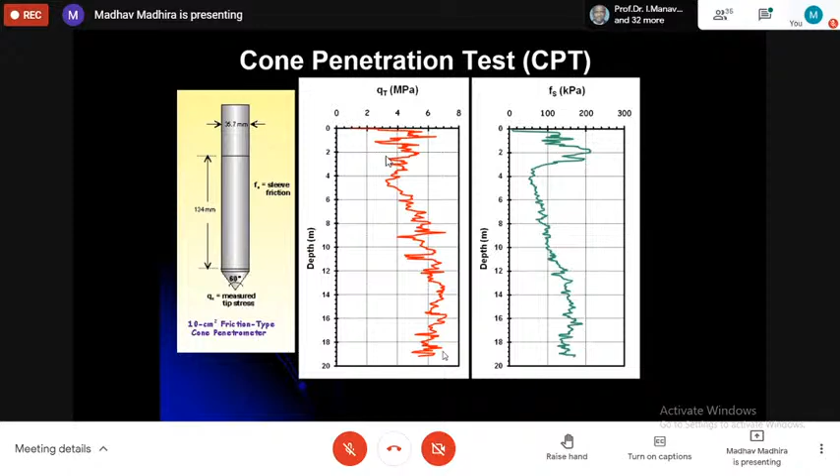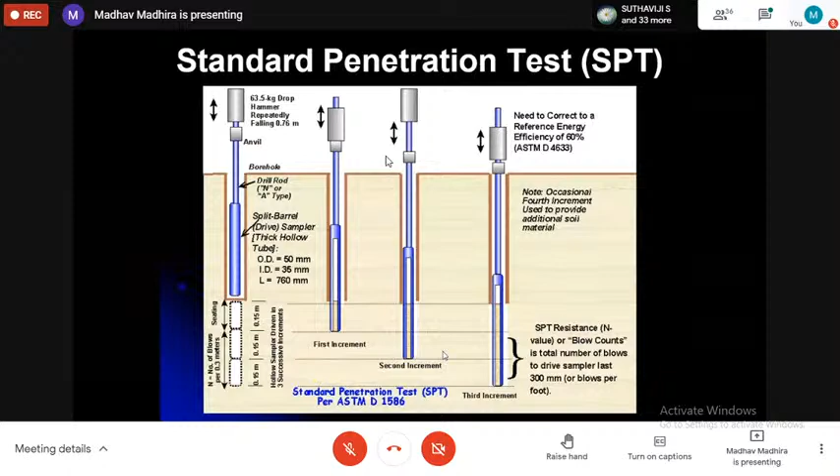We go back to 150 to 300, 300 to 450. That's the value we have. And based on that, Terzaghi gave, originally in '48, modified in 1967, allowable pressures. But I want you to see how conservative it is. The observed settlement is much smaller than what is predicted, by a factor of 2. So please remember, we are very conservative if we are using the Terzaghi-Peck chart.

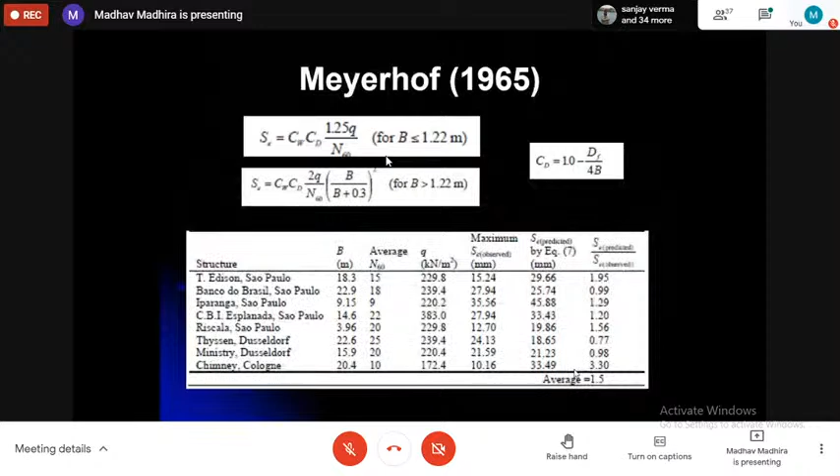So Meyerhof said at least increase by 50%, and he gave the values. Even here with Meyerhof's, I can see the values can vary anywhere from 0.7 to 3 times. So we are over-predicting the settlements, whereas we could easily go for higher values.

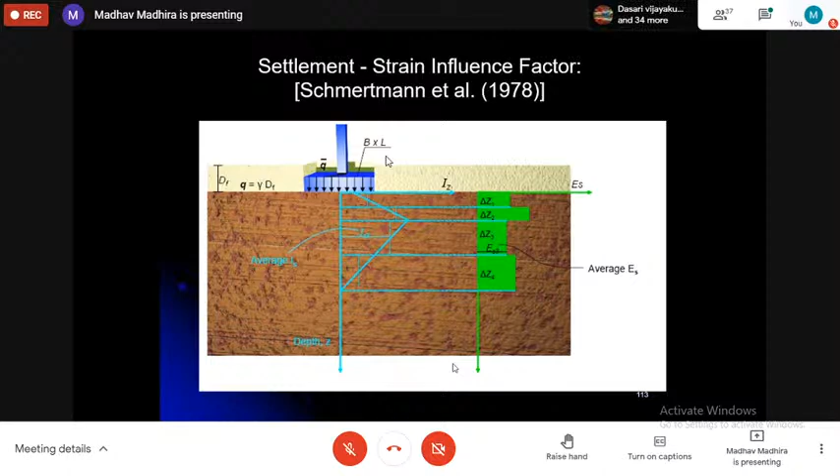So I want you to now go back to Schmertmann's method, which is one of the most elegant ones, particularly for sand. We can use it for fine-grained soil, provided you take the drained modulus. He looks at the strain variation with respect to the footing depth, and you can see strain increases from a small value to a maximum at a depth of, say, B by 2 or 1, and becomes 0 at 2B. And then he gives you a very simple expression, and the value of E is estimated from the tip resistance as 2.5 to 3.5 times the tip resistance. That is 2.5 times qc for square and 3.5 qc for strip foundation.

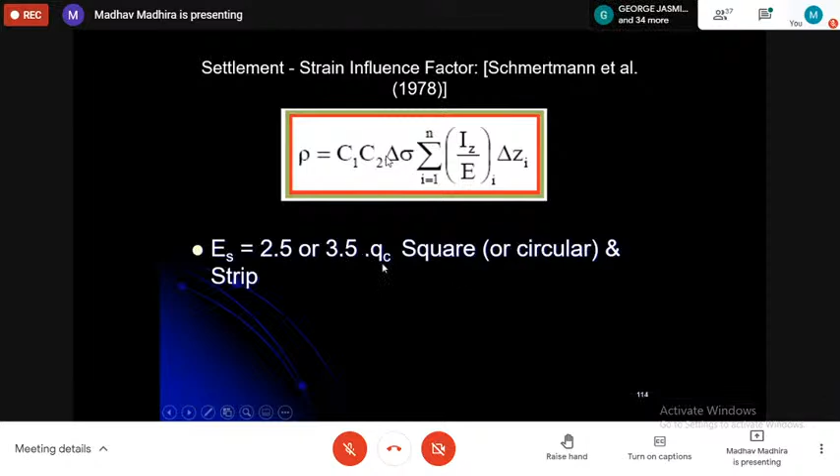And these are the variations we now use in our predictions: strain variations, strain influence factor, and based on that we can calculate the settlement. Similarly, Burland and his student Burbidge came out with an SPT variation also, and they found out the zone of influence and calculate the N value. Don't take the value just at the footing level, take it about 1.5 to 2 times the width and take the average and calculate. And now when you do that, the chances of over-predicting are much less in this case, and you'll be much better off. The probability of exceeding is very, very low in these cases.

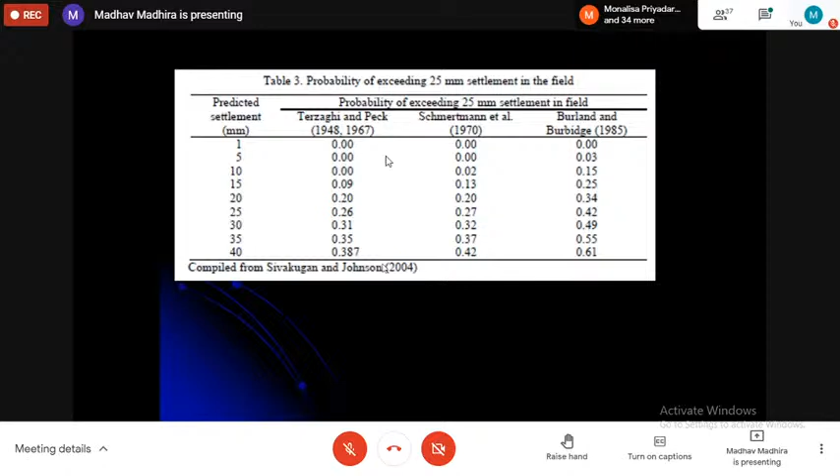So basically what we tried to cover today is that ultimate capacity or allowable capacity of foundations is not a function of strength alone, it's a function of strength and stiffness of the ground. Second, you can't ignore the height of the structure. You have a different phenomenon called leaning instability. For all I know, if I had the data, I could have done it for the Transcona grain elevator. It's a leaning instability failure, like the Tower of Pisa too. The importance of stiffness of the ground and kinematics are very important, as we have shown with respect to laterally loaded piles particularly.

And lastly, I would like you not to go for bearing capacity, but use settlement as a criterion. Use SPT N or qc to calculate the settlements for working load, and use that as your prediction for allowable pressure. And here I would like you to use either the Schmertmann method, which is based on originally qc, but we convert N into qc, or use the Burland and Burbidge method too.

So I'd like to thank you for your patient listening. And I would like to end by saying, can I say that Terzaghi is somebody like Newton? If you remember your physics, Newton said space and time are two different things. They're not connected. Whereas the same thing, Terzaghi said the stability problems are very different from those of deformation parameters. So I somehow think Newton and Terzaghi are in the same category. They are brilliant people, but at their time of science, they somehow uncoupled the two parameters. Newton uncoupled space and time. Terzaghi uncoupled strength and deformation. Whereas now we know Einstein said that space-time are related.

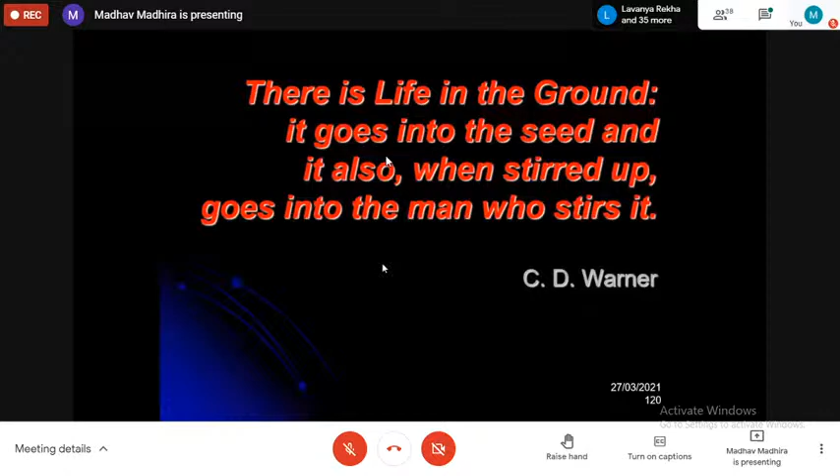So people like, say, Gibson or Roscoe, and now all of you have to think in terms of a combined, coupled deformation and strength as a criterion for ground and soil. I'd like to end with something I found very good. There's life in the ground. It goes into the seed, and it also, when stirred up, goes into the man who stirs it. I've been practicing geotechnical engineering for nearly 60 years, and I find it's a fantastic field, and I want all of you to enjoy the beauty of geotechnical engineering. Thank you very much.

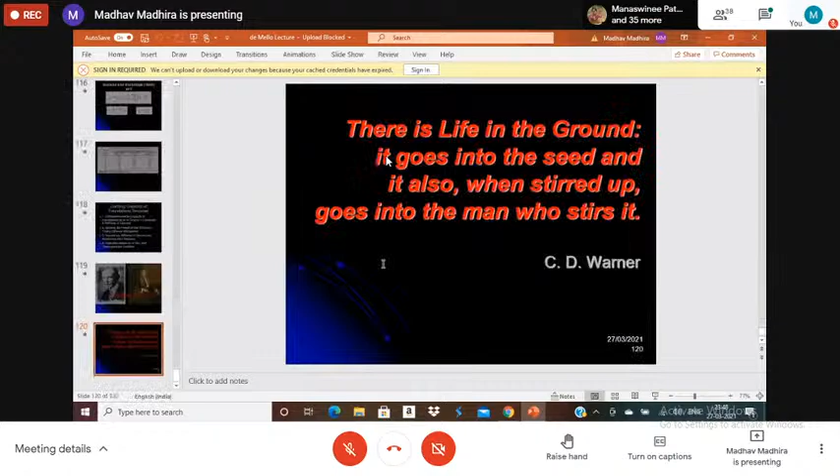And if you have any points to discuss, I'll be too happy to do the same. Okay? You're welcome to discuss. So any queries? Any other participants would like to discuss? I would be very happy to respond.

Hello, sir. Yes, sure. Good morning, sir. It was a very nice presentation, sir. Thank you so much. I'm glad you appreciate it.

We should rewrite our textbooks, wherein we calculate the so-called bearing capacity as a function of a deformable solid and not as a rigid plastic one. Yes, sir. Definitely, I have to practice many things. Some things I really didn't know. I have to practice it, sir.

Sir, actually, I have a question. It was mentioned about Schmertmann and Burland and Burbidge. These settlement parameters, I know we are using from SPT. Can we use it for cohesive soils as well? Sure. The same method. If you are using the N value, no problem. Burland and Burbidge is on N value.

The second most important thing is when you do a lateral load test, as I told you in one of my lectures, we do it with a free head pile, but we never use a free head pile in practice. It's a fixed head pile. So you have to use appropriate solutions for a fixed head pile, as a function of L by D and pile fixity. The second lecture gave all the details about how to calculate the lateral load response of piles.

Any more? Okay. Then I'd like to wish you all a happy Holi. Hope to see you again on Tuesday for a lecture on ground improvement and using reinforced foundation beds.

I hope the participants have got some new ideas for taking this forward. So I thank you very much, sir, for sparing your valuable time and for giving this interesting and highly informative lecture. It's my pleasure, Professor Reddy. Sir, good luck to you. We look forward to your lecture on 30th of March during the morning session.

Right, sure. On engineering of ground for foundations in weak or soft soils. Professor Madhav will be touching upon various ground improvement options for weak soils to enable laying foundations. I hope all of you have enjoyed. Have a happy Sunday, and don't forget to join back at 4 p.m. We have 2 more lectures in the evening session. Professor K.S. Rao has some portion to be covered, for 30 to 45 minutes from 4 o'clock.

And after that, I'll be presenting some case studies of foundation failures.